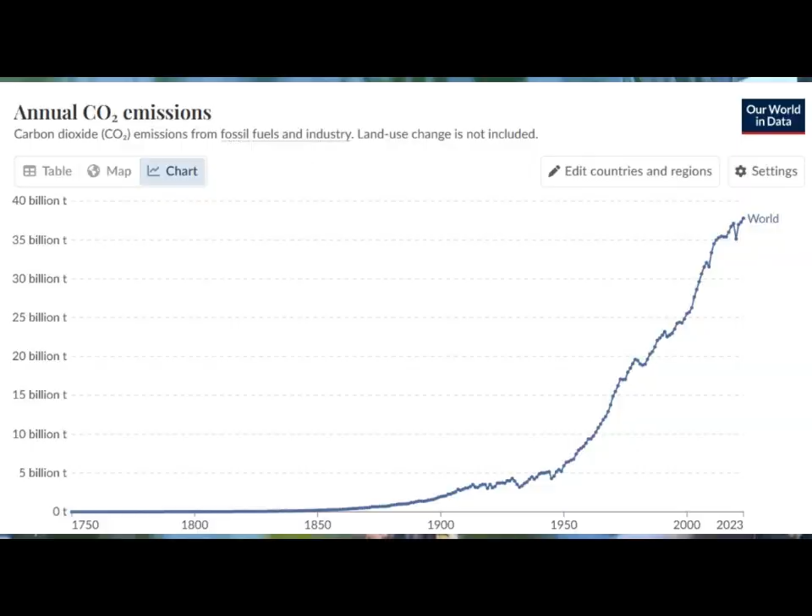38 billion metric tons - that's the amount of carbon dioxide emitted globally last year, and it's only going to grow exponentially larger. You might think that recycling solves the greenhouse emissions problem, but you'd be completely wrong.

Only 30% of recyclable waste in America truly ends up being recycled. It is true that aluminum is also recycled, but only around 65% is actually recycled. This unrecycled waste is later exported to foreign countries and incinerated.

Greenhouse gases sooner or later pile up and are currently the largest threat to ecology. Researchers predict that if we don't act right now, more than 1 million species could go extinct in the coming decades. This proves why we need to focus on solving this issue.

However, to combat this very critical issue, we have founded Kahari. We created Kahari to revolutionize clean energy generation by turning aluminum waste into viable electricity through an innovative zero-waste microgrid solution. This addresses the critical problems of failing recycling programs, ineffective microgrid options, and high carbon emissions.

We offer a sustainable and cost-effective alternative to traditional energy sources such as natural gas and solar energy. By converting scrap metal into energy on-site, Kahari not only reduces waste, but also provides a new renewable energy source that is environmentally sustainable. On a broader level, it's a trash can that uses aluminum waste to create hydrogen and therefore electricity.

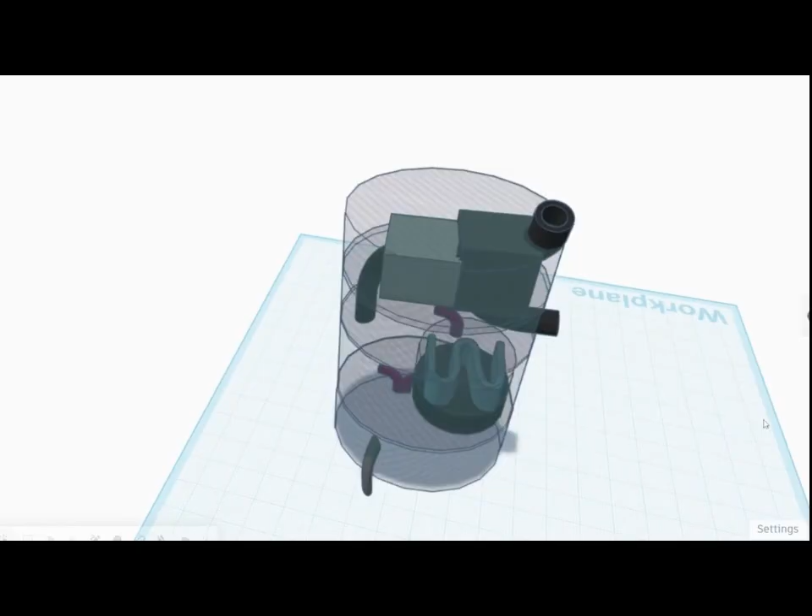Now let's take a closer look at the contraption. Soda cans or aluminum waste enter through the input into what we call the preparatory chamber. Then it is pulverized to increase the surface area. Sensors will allow waste to be filtered out.

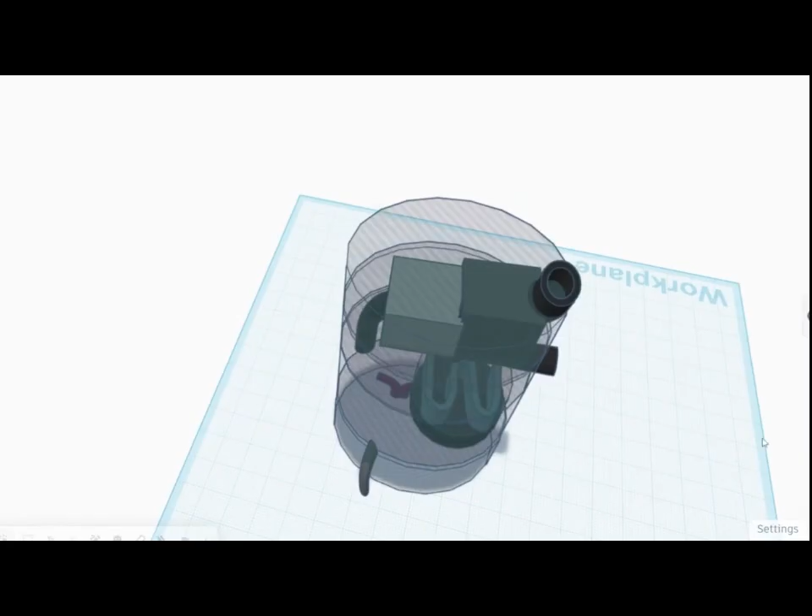The pulverized aluminum reacts with water, which triggers an exothermic reaction, resulting in hydrogen. To increase efficacy of hydrogen production, the surface area of the aluminum waste is maximized in the preparator. At any time, manual override can be initiated in case of abnormal temperatures or abnormal pH.

Hydrogen builds pressure in the reactor chamber, which pushes the hydrogen from the reaction tank into the storage tank. Also, the heat exchange mechanism between the reaction chamber and a compressor maintains the temperature in the reactor, using the generated heat to compress the hydrogen.

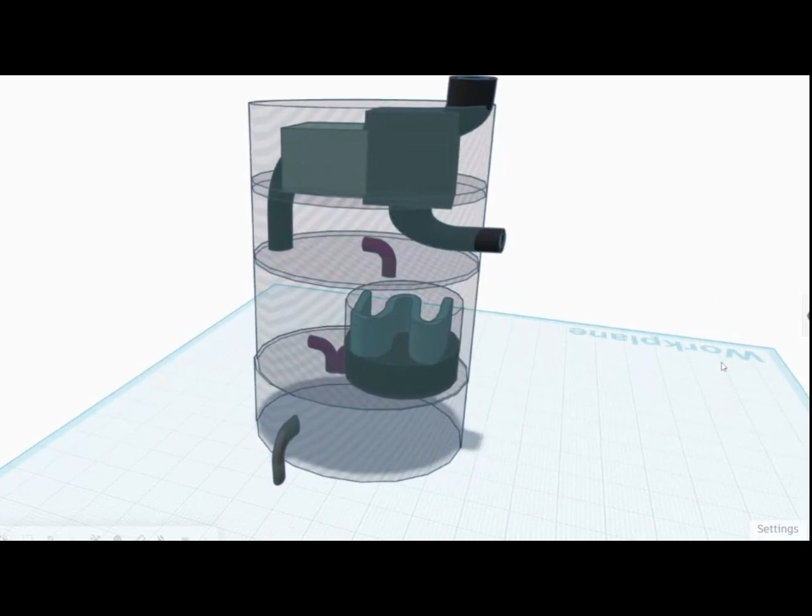When Kahari's hydrogen capacity is full, it is then flushed into the external storage chamber to produce electricity. The waste will be at the bottom compartment, which we call the collector chamber, where the reaction's byproduct aluminum hydroxide can be flushed into the aluminum recycling facility. It can then be converted back into aluminum or used pharmaceutically.

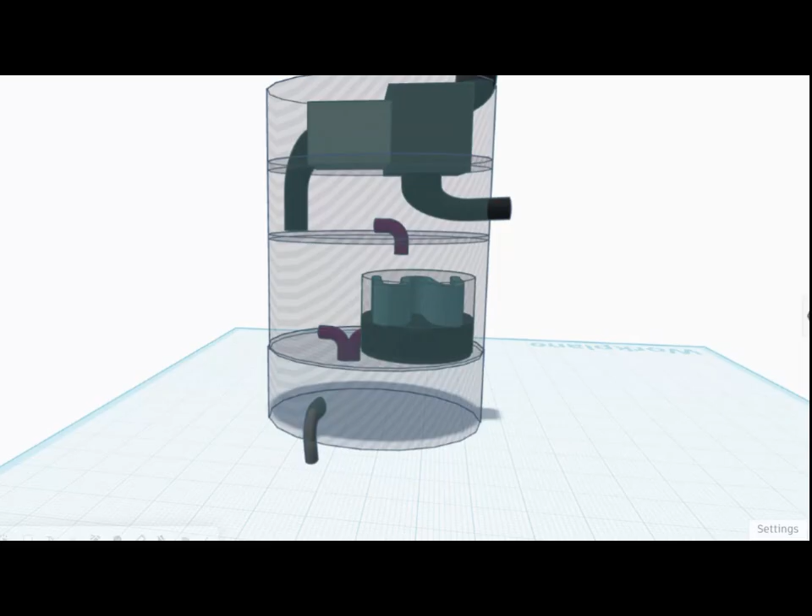Finally, the hydrogen kept in the external storage will be converted into usable electricity in a fuel cell or microgrid. Either way, Kahari will retain scalability, so it can be designed to power units of any size.

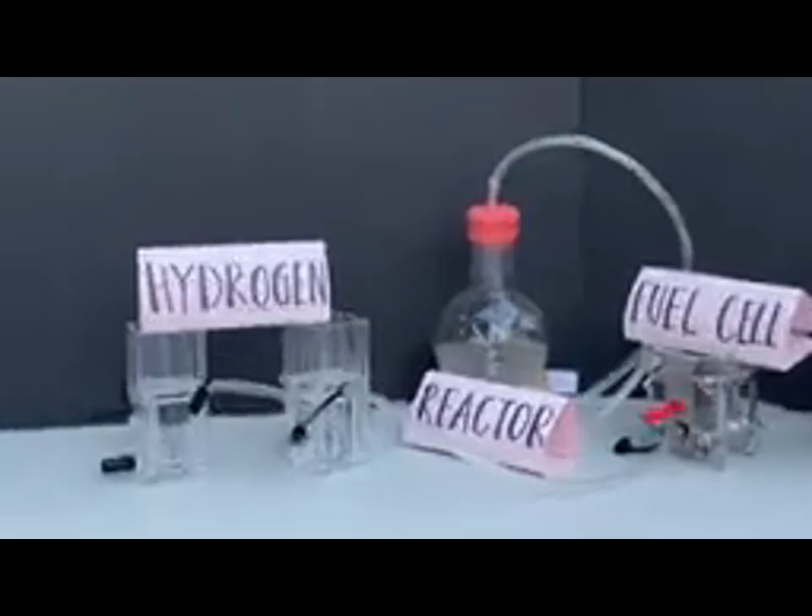Continuing, we have a functional proof of concept which validates our chemical process. The reactor's bits of aluminum along with water undergo a chemical reaction, which generates hydrogen. This hydrogen is then transferred into a tank, which you can see here.

As needed, the hydrogen from these tanks is later transferred into the fuel cell. In the fuel cell, hydrogen and oxygen are combined together to create electricity. This electricity can then be used to power the light, as shown above in this house.

We have eliminated the dependency on fossil fuels for energy generation. We have reduced energy storage costs significantly by using hydrogen instead of lithium batteries. And we have also raised energy efficiency by optimizing the chemical reaction of aluminum and water.

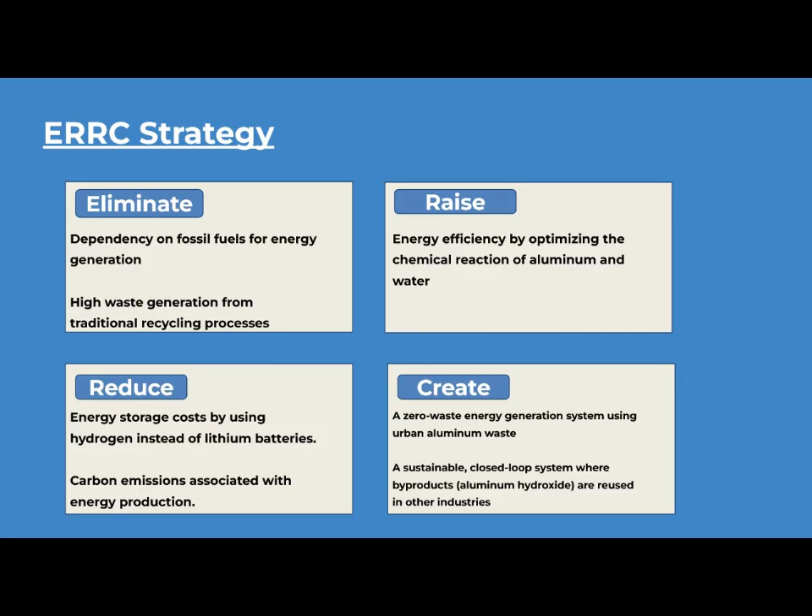In Tier 1, we have non-renewable energy users in suburban or urban areas who are dissatisfied with the energy costs but haven't been able to switch due to the lack of proper alternatives.

Tier 2 is non-renewable energy users who are in a developing or remote area and are not able to switch due to a lack of infrastructure and affordable, decentralized solutions. And Tier 3 is communities in underdeveloped or rural areas with no access to energy infrastructure or recycling programs.

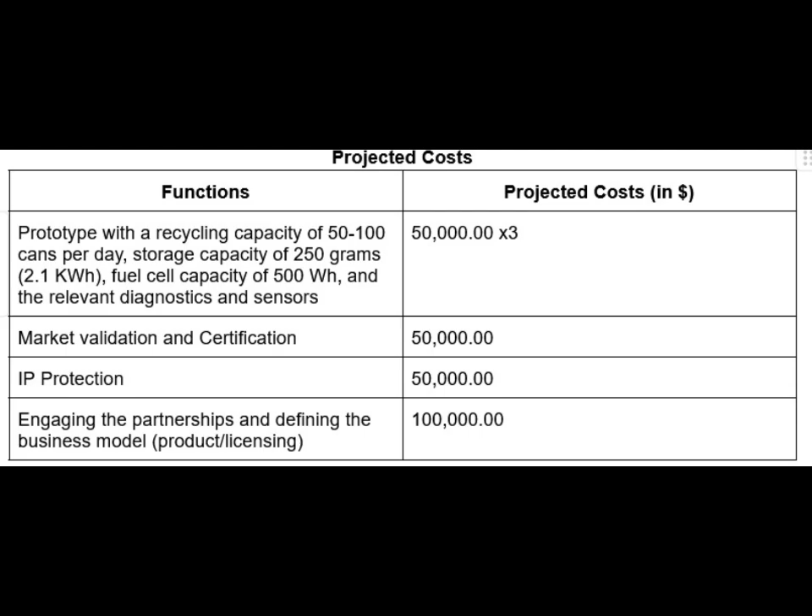We estimate our costs to be around $350,000. This is our progress and projections for Kahari. We are hoping to launch around April of 2027. We have applied to a few grants and are now waiting for the results.

To conclude, Kahari will create sustainable energy, reduce waste, and lower carbon emissions. Our product will revolutionize the energy industry, providing a cost-effective and scalable alternative. Kahari improves lives and helps the world become more sustainable. This is just the beginning of a blue ocean.